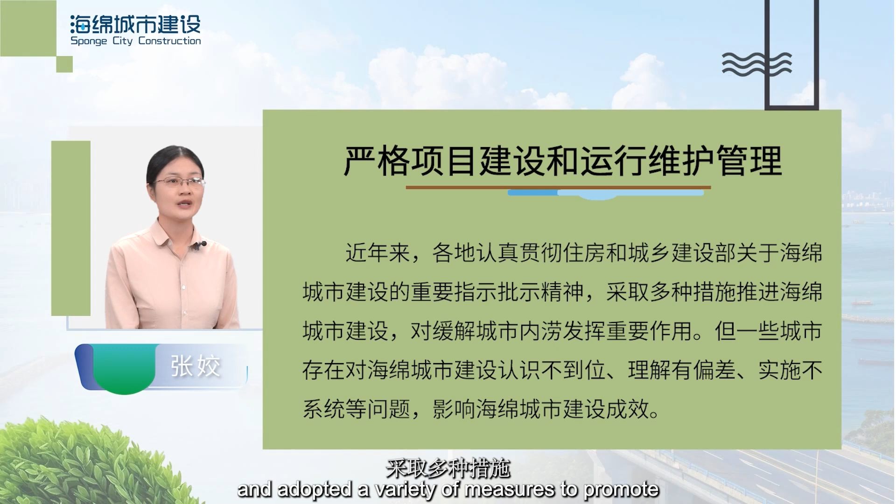In recent years, all localities have conscientiously implemented the spirit of the important instructions of the Ministry of Housing and Urban Rural Development on the construction of sponge cities, and adopted a variety of measures to promote the construction of sponge cities, which has played an important role in alleviating urban waterlogging.

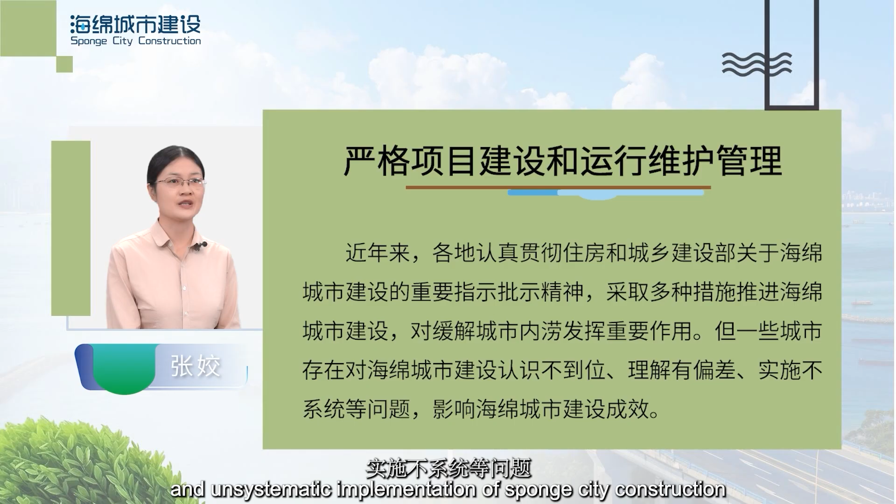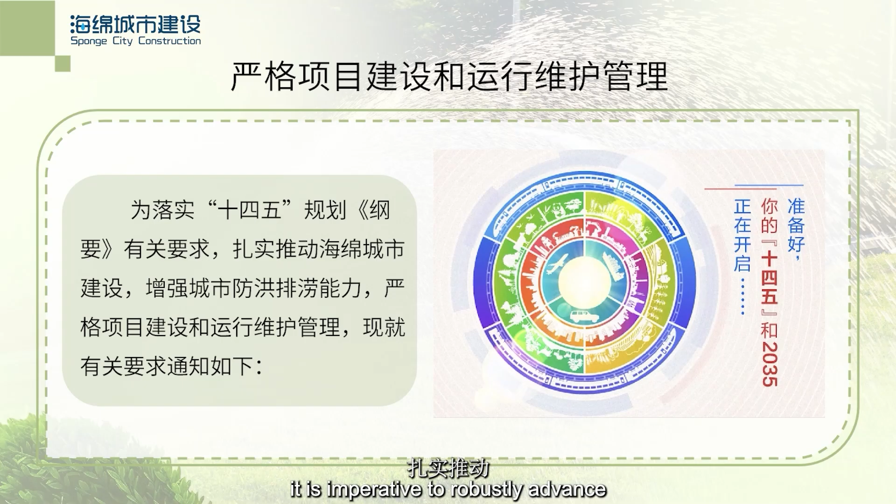However, some cities have problems such as insufficient understanding, misunderstanding, and unsystematic implementation of sponge city construction, which affect the effectiveness of sponge city construction. In alignment with the outline of the 14th Five-Year Plan, it is imperative to robustly advance the construction of sponge cities. This entails bolstering the urban hydraulic infrastructure to effectively manage flood discharge and meticulously govern the construction and subsequent maintenance of related projects.

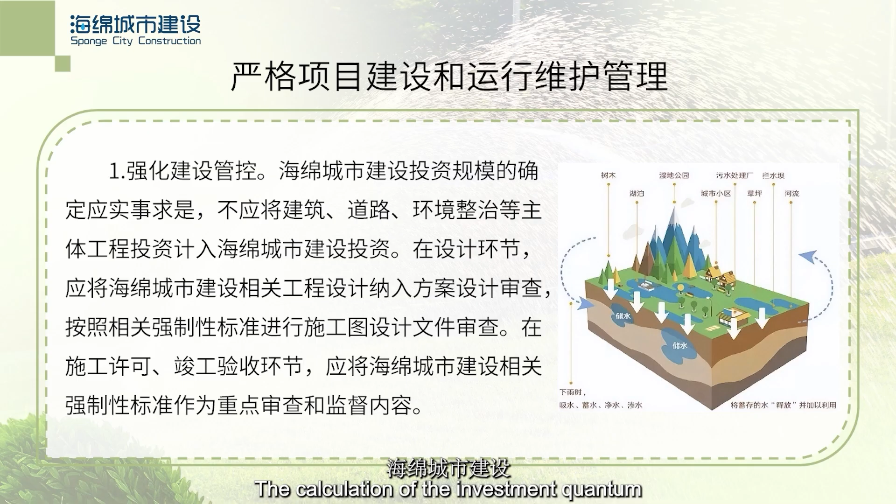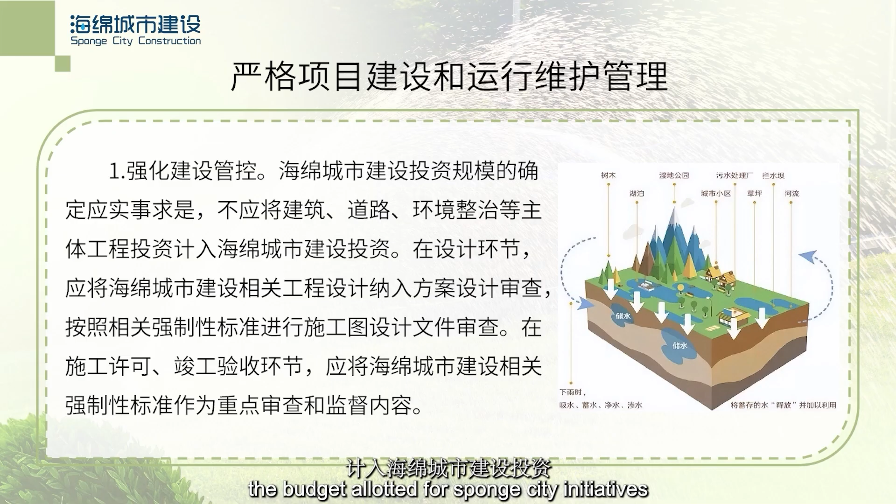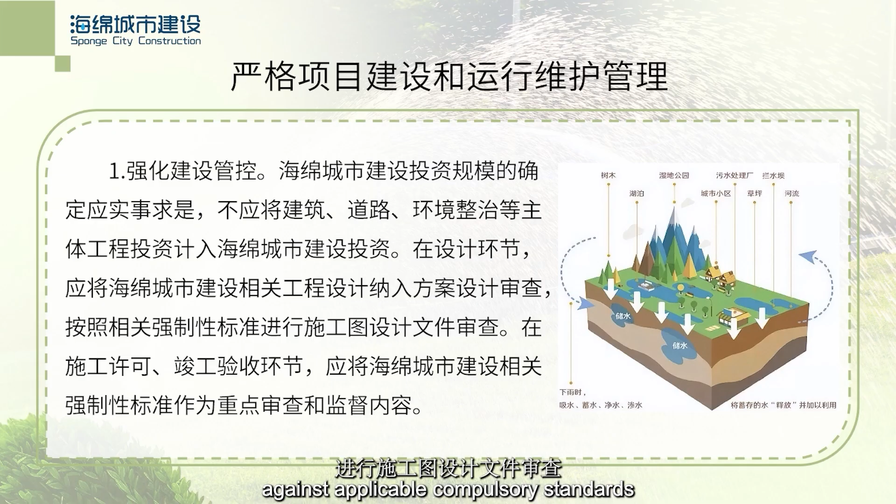The stipulations are henceforth communicated as follows: enhancement of construction governance. The calculation of the investment quantum for sponge city development necessitates pragmatism. Capital allocation for core projects such as structures, thoroughfares, and environmental rectification must be delineated from the budget allotted for sponge city initiatives. During the design phase, architects are supposed to integrate sponge city constructions into their schematic reviews, with a thorough vetting of construction drawing designs against applicable compulsory standards within the construction licensing and final acceptance.

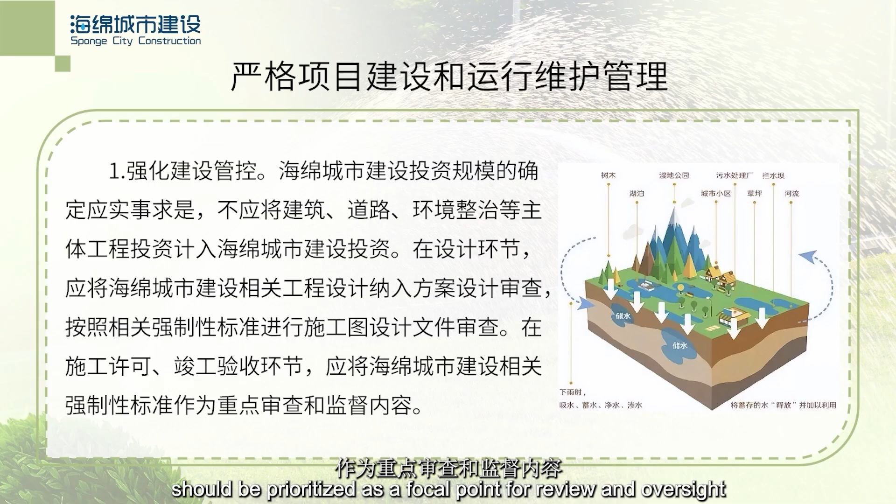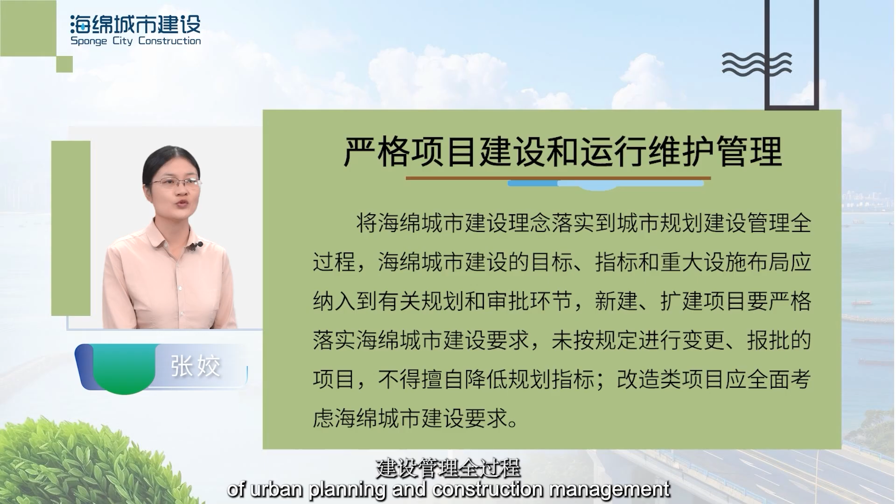Adherence to sponge city construction mandates should be prioritized as a focal point for review and oversight. The principle of sponge city construction should be integrated throughout the entire spectrum of urban planning and construction management. This entails incorporating the objectives, metrics, and configuration of key sponge city facilities into the pertinent planning and approval processes.

Newly proposed and expansion projects must rigorously adhere to the standards set forth in sponge city construction. Any projects that have not been altered and submitted as required for approval must not arbitrarily lower the established planning indicators. Furthermore, renovation projects should take into comprehensive consideration the necessities of sponge city construction.

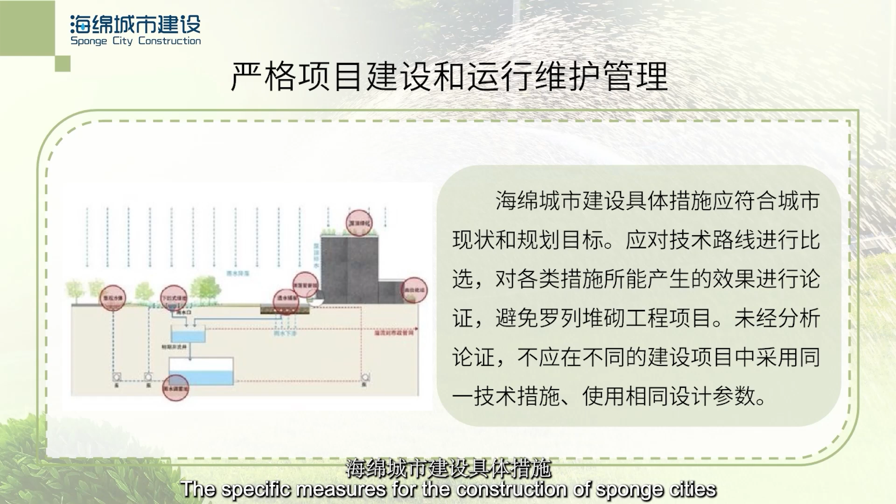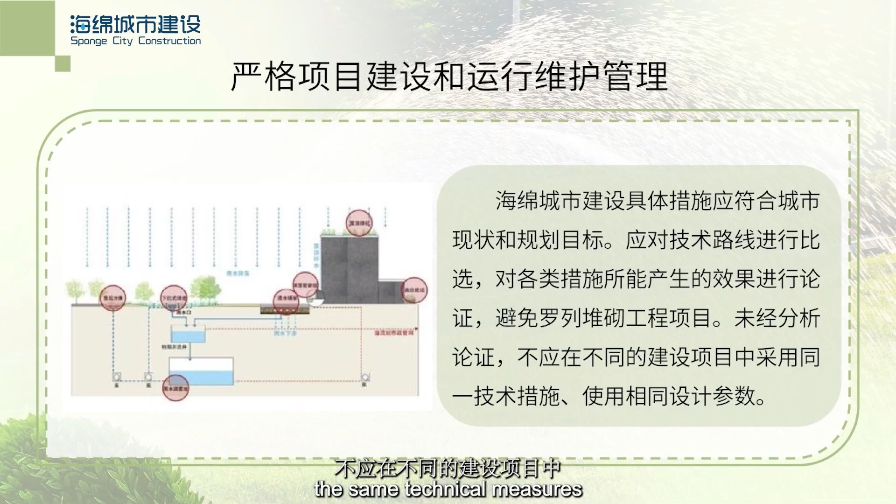The specific measures for the construction of sponge cities should be in line with the current situation and planning goals of the city. The technical route should be compared, and the effects of various measures should be demonstrated, so as to avoid listing and piling up engineering projects without analysis and demonstration. The same technical measures and the same design parameters should not be used in different construction projects.

Strengthening construction management: Sponge city construction projects should be constructed in strict accordance with the drawings, implement the vertical requirements of the site, ensure the continuous and smooth collection of rainwater, and control soil erosion, strengthen the quality inspection and record keeping for underground pipelines and detention facilities, etc.

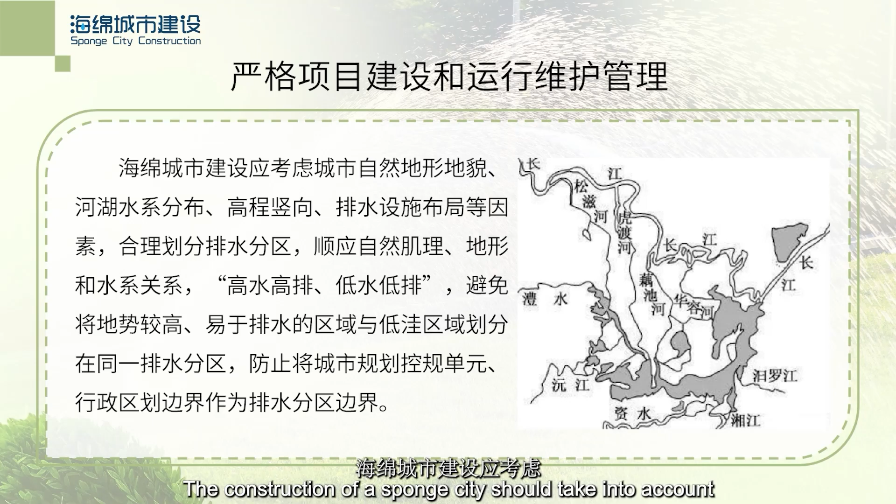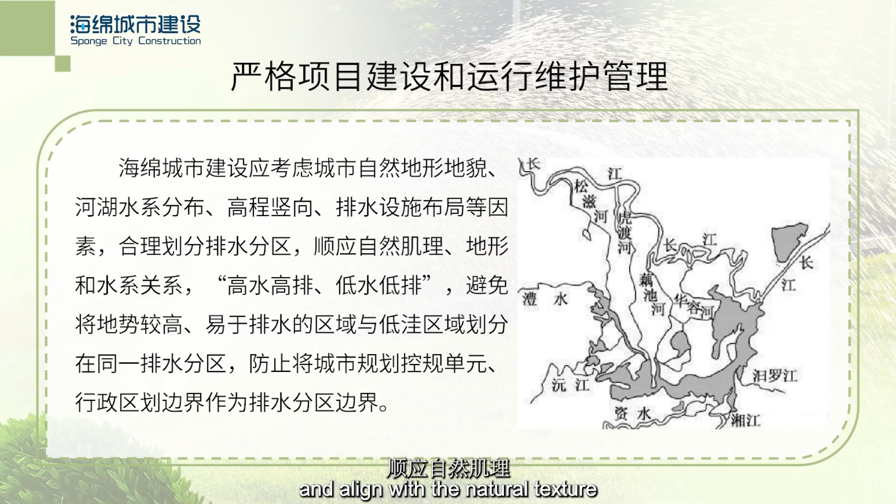The construction of a sponge city should take into account natural topography, river and lake water systems, elevation gradients, and the layout of drainage facilities, among other factors. To rationally divide drainage areas and align with the natural texture, topography, and water system relationships, high water goes high, low water goes low. We should avoid dividing areas with higher elevations and easier drainage into the same drainage area as low-lying areas.

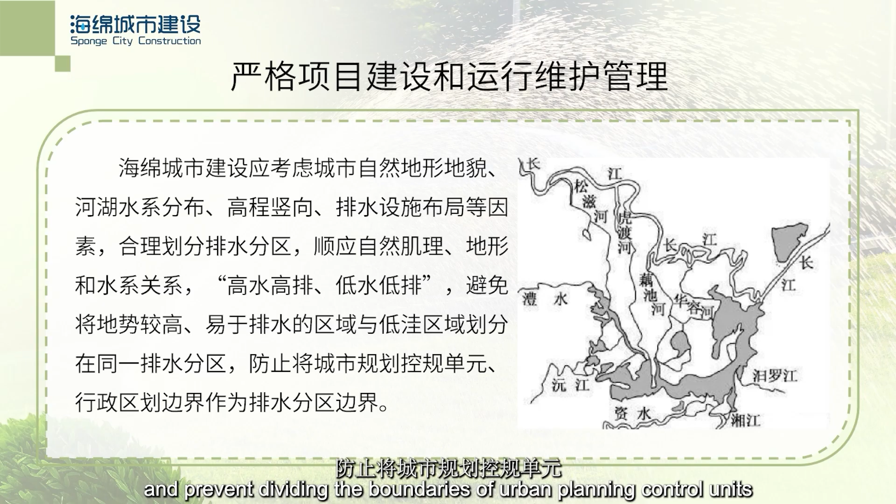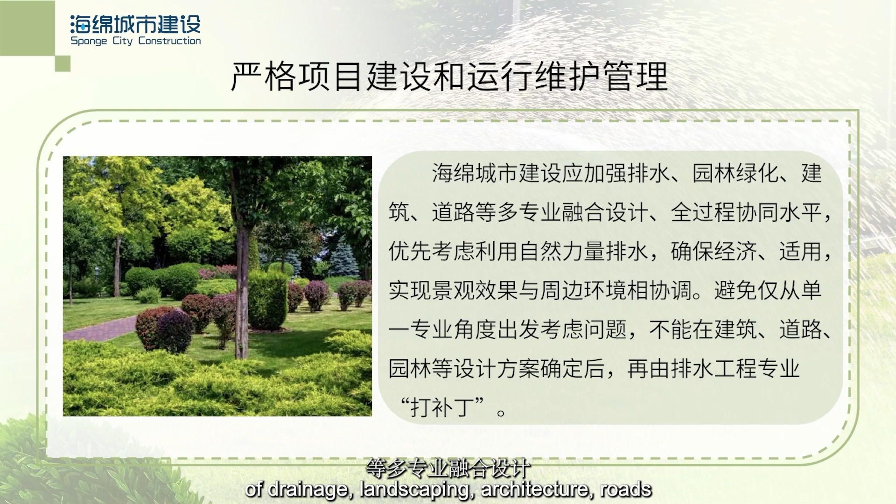And prevent dividing the boundaries of urban planning control units and administrative divisions into drainage areas. The construction of sponge cities should strengthen the integrated design and whole process coordination of drainage, landscaping, architecture, roads, and other disciplines, give priority to the use of natural forces for drainage, ensure economy and applicability, and realize the coordination between landscape effect and the surrounding environment.

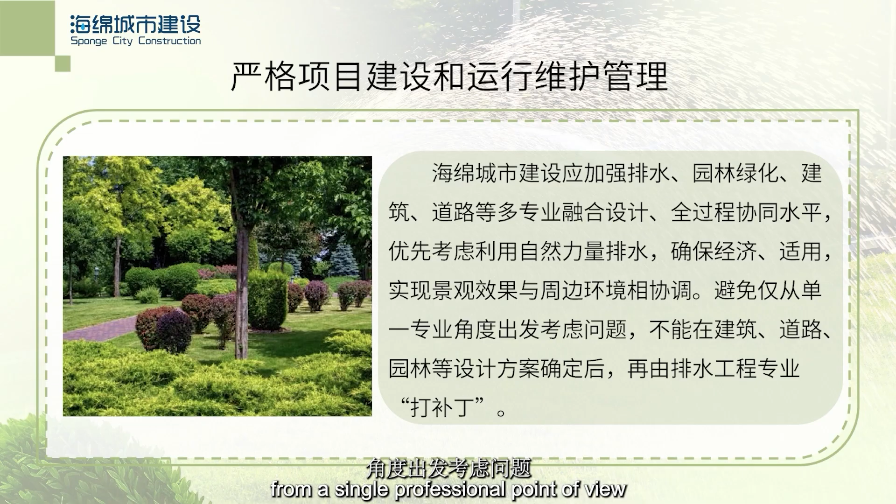Avoid considering the problem only from a single professional point of view, and cannot be patched by the drainage engineering major after the design scheme of buildings, roads, gardens, and other designs is determined.

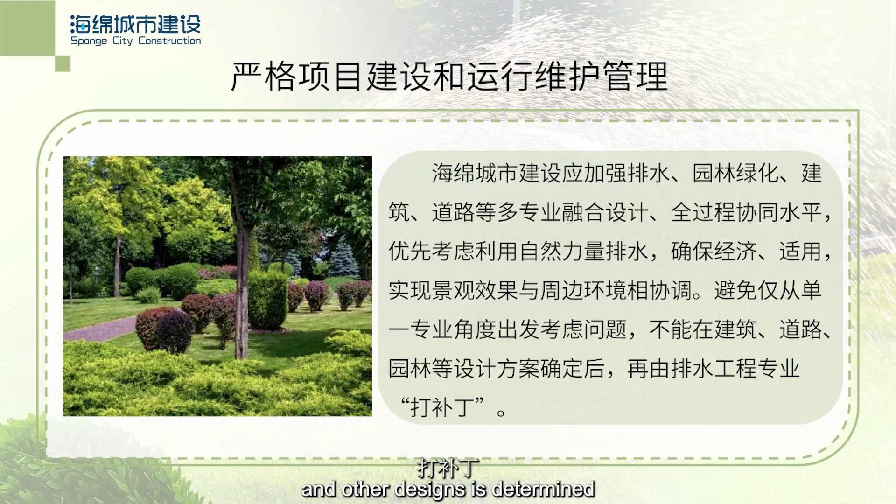Carry out operations and maintenance tasks. Specify the entity tasked with the operation and maintenance of relevant facilities within the sponge city framework. Allocate funds appropriately. Conduct thorough daily maintenance and guarantee the optimal functionality of these facilities. Strive to prevent scenarios where there is no accountable party, insufficient financial support, or other issues.

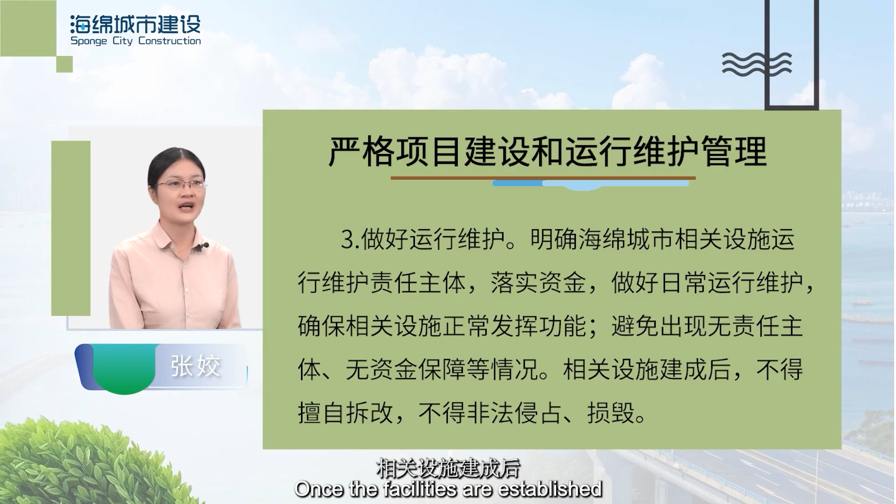Once the facilities are established, unauthorized demolition, alteration, illegal occupation, or damage should be strictly prohibited. Establish a daily maintenance system for rainwater facilities, a pre-storm inspection system, an emergency response system, and an efficiency monitoring system for rainwater facilities in a sponge city. Train professional operators to have specialized technical knowledge in the operation and maintenance management of sponge city facilities.

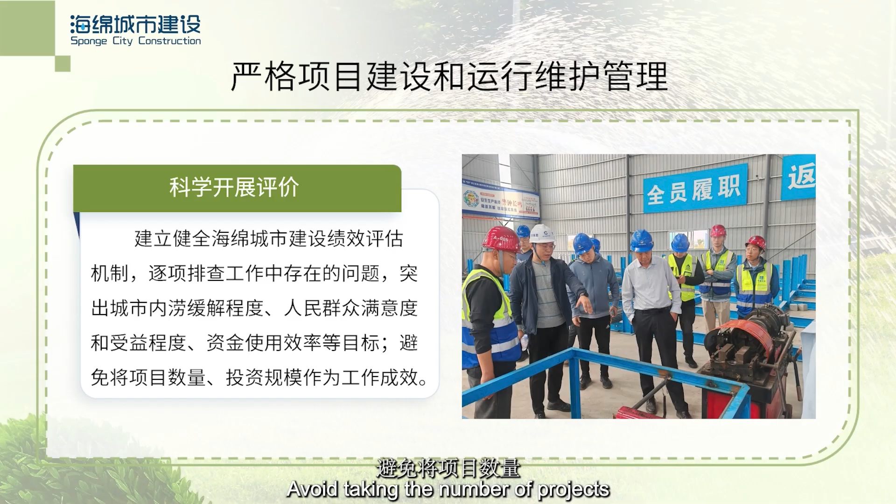Carry out evaluation scientifically. Establish and improve the performance evaluation mechanism for sponge city construction. Investigate the problems existing in the work item by item, and highlight the goals of urban waterlogging mitigation, people's satisfaction and benefit, and fund use efficiency. Avoid taking the number of projects and the scale of investment as work results.

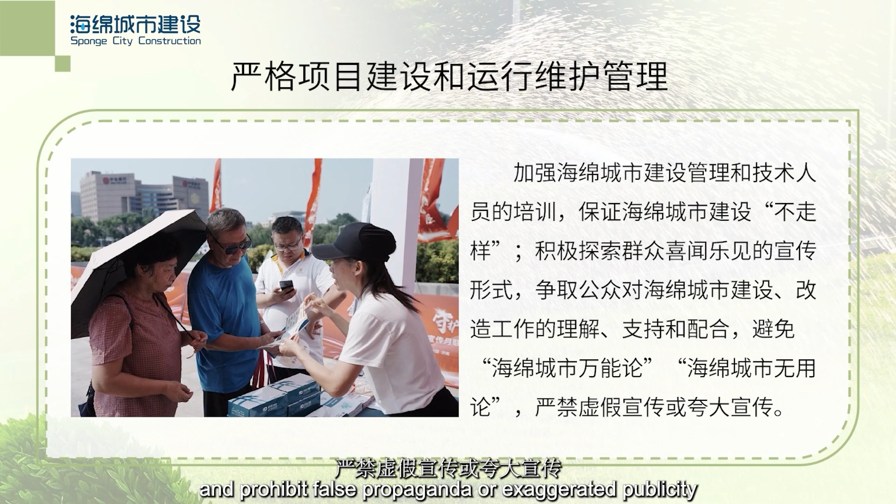Strengthen the training of sponge city construction management and technical personnel to ensure that the construction of sponge city is not out of shape. Actively explore the forms of publicity that the masses like to see. Strive for the public's understanding, support and cooperation for the construction and transformation of sponge cities. Avoid the sponge city omnipotence theory and sponge city useless theory, and prohibit false propaganda or exaggerated publicity.

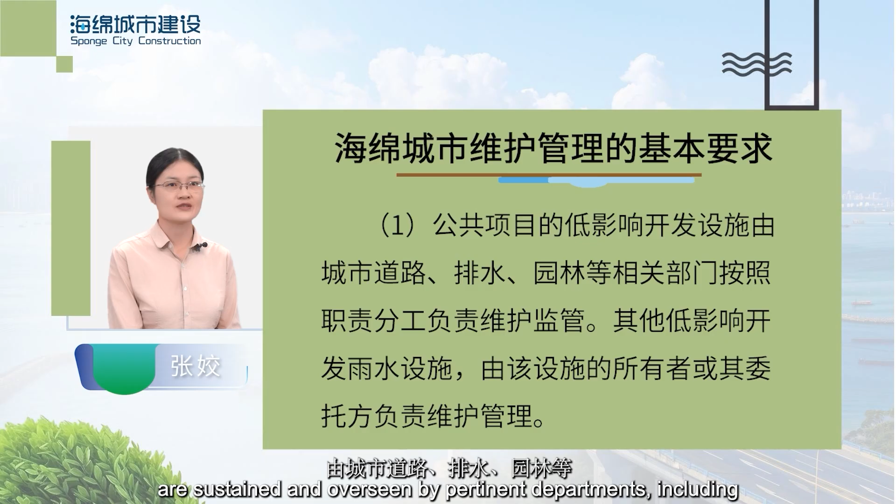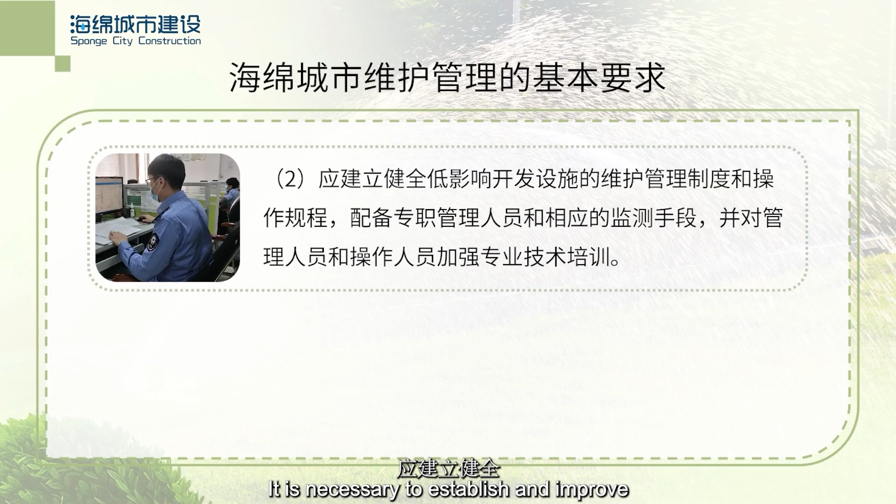The basic requirements for the maintenance and management of sponge cities: low-impact development facilities within public projects are sustained and overseen by pertinent departments, including those responsible for urban roadways, drainage systems, and green spaces, in accordance with respective allocations of duties. Maintenance and oversight of all other low-impact development stormwater facilities fall under the purview of the facility's proprietor or their designated agent. It is necessary to establish and improve the maintenance management system and operating procedures of low-impact development facilities, allocate full-time management personnel and corresponding monitoring means, and strengthen professional and technical training for managers and operators.

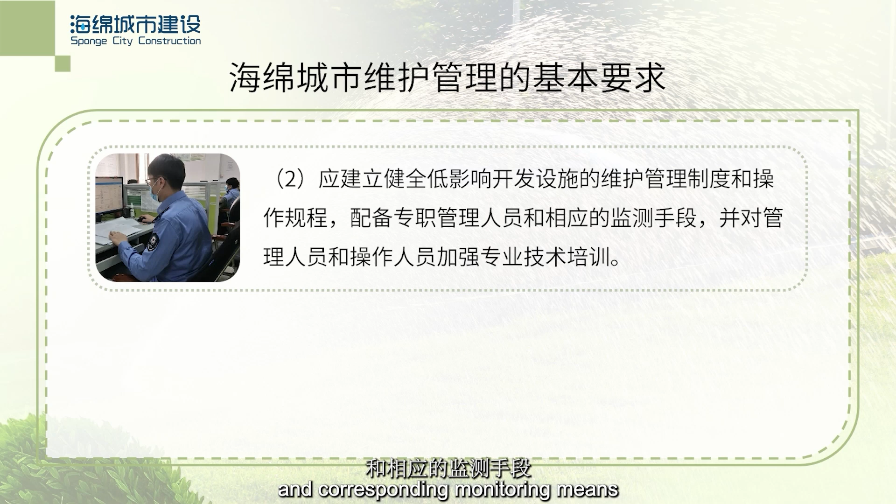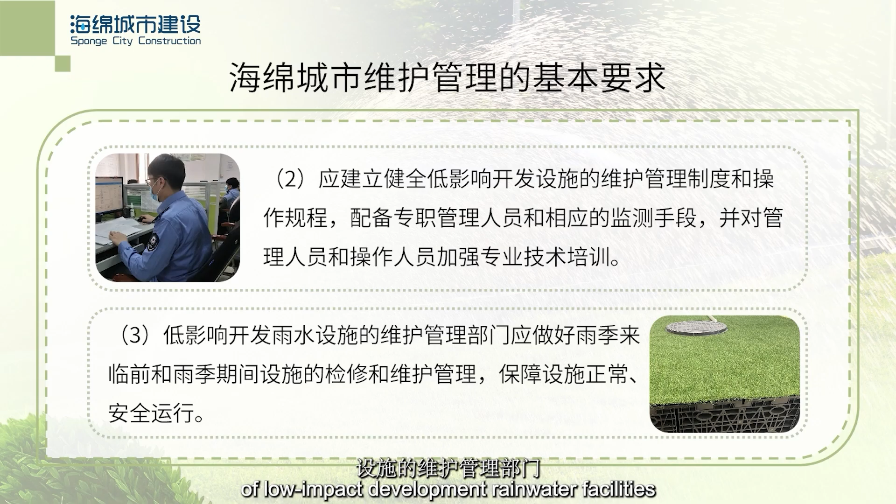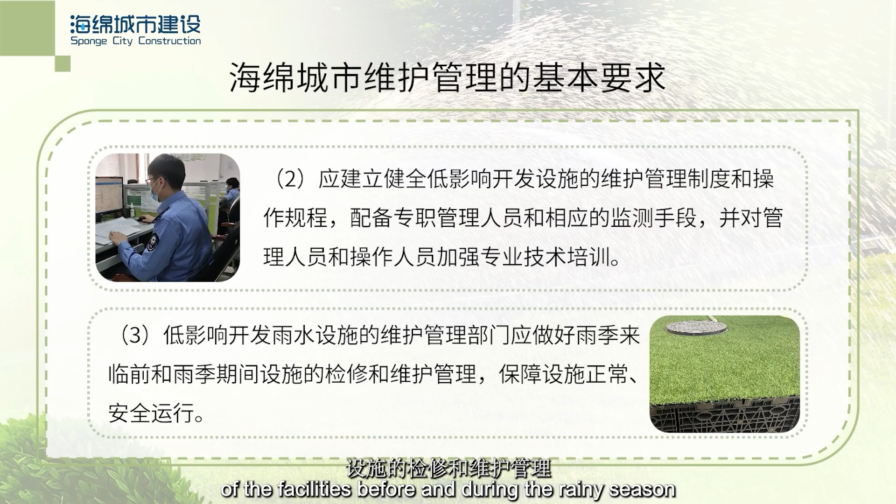The Maintenance and Management Department of low-impact development rainwater facilities should do well in the overhaul and maintenance management of the facilities before and during the rainy season to ensure the normal and safe operation of the facilities.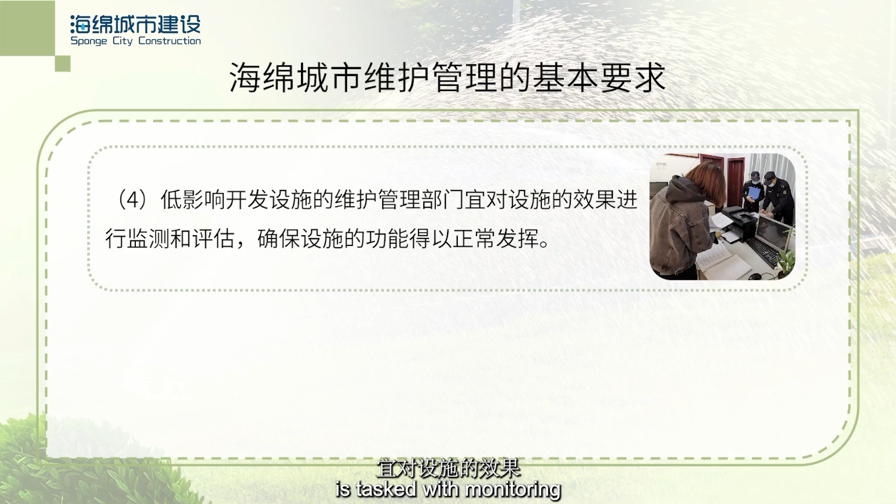The Maintenance Management Division of the Low-Impact Development Facility is tasked with monitoring and assessing the efficacy of the facility to guarantee the uninterrupted operation of its functions.

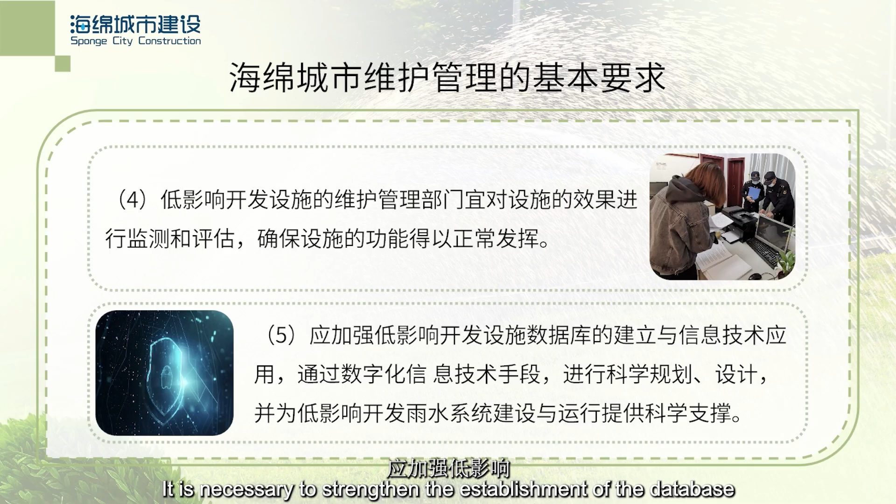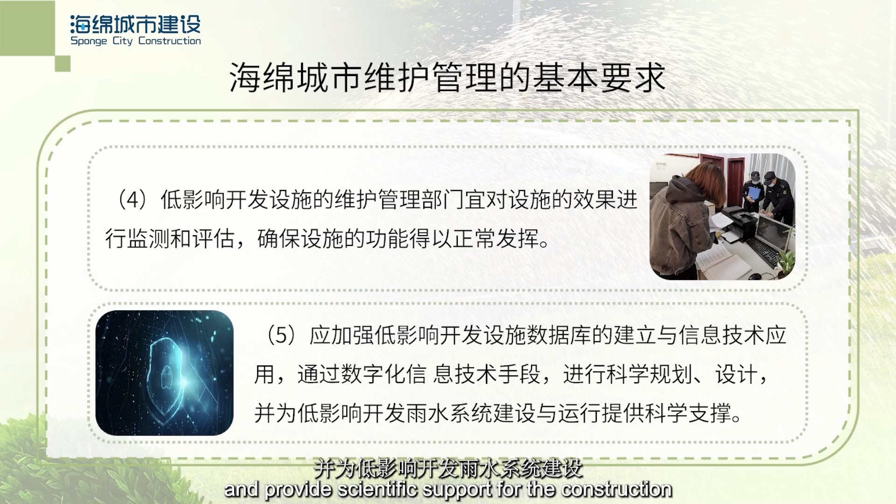It is necessary to strengthen the establishment of the database of low-impact development facilities and the application of information technology, carry out scientific planning and design through digital information technology, and provide scientific support for the construction and operation of low-impact development rainwater systems.

More efforts should be made to raise public awareness of the importance of rainwater control and utilization in the construction of sponge cities, low-impact development, green buildings, urban water conservation, water ecological restoration, and flood prevention and control. Public participation should be encouraged in the construction, operation, and maintenance of low-impact development facilities.